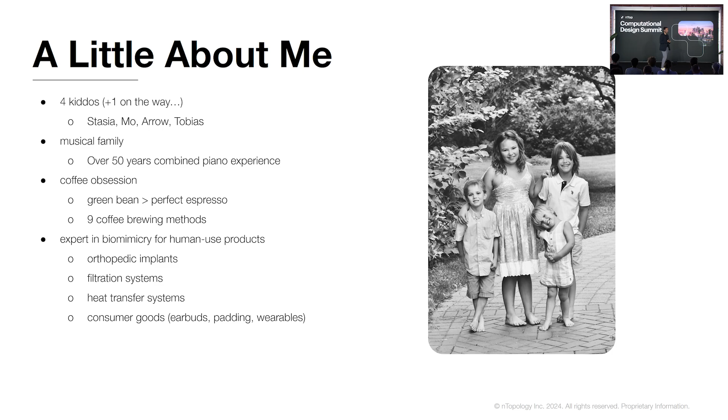And then, as Brad mentioned, I've just been privileged over the last decade or so to be able to take and produce biomimetic structures using computational design. And across the spectrum, right? Orthopedic implants is a specialty of mine. I've been able to work with large companies on the consumer goods side to build heat transfer systems, and to work on oil and gas systems as well. So it's just been a blast. So I'm going to talk about a couple applications first that are sort of here and now, and then a few future thinking applications. I'm going to try to get through this in my 13 minutes left, so we'll see.

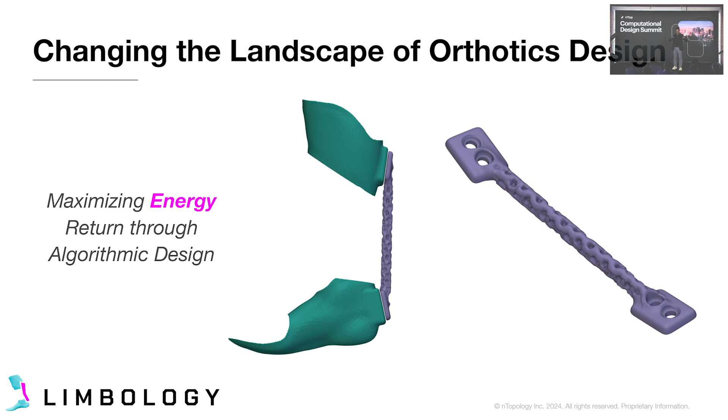So the first one is a company I've been working on with a friend of mine, and he came to me as a prosthetist, somebody who works day to day with people that have partial foot amputations in particular, but other sort of problems. And one thing in particular is in the world of CAD, orthotics and prosthetics is like decades in the past. A lot of the technologies these guys are using are like casting people and their anatomy. So if you think about what computational design can do for something like this, it becomes immediately apparent. But a lot of the time the software and systems aren't necessarily made for this.

So he came to me and said, hey, there's a lot of young people that have had amputations or some sort of deformity where the current stuff just doesn't work for them. Essentially it's carbon struts, some thermoform pieces. The materials are either too flexible or too stiff, depending on what you're trying to do. They don't provide sufficient energy return. They're exhausting to run in. The single-piece unibody designs aren't necessarily efficient. And the biggest problem is prosthetists spend hours to create something that's bespoke for a person.

And this is a similar theme, right? Med device, bespoke, patient-specific. You'll hear a lot of those things. It's an incredible way to utilize additive manufacturing and computational design. Even 3D printed products, which are starting to become a little more familiar, still suffer from a lot of things. Principal amongst them is that no one's really designed struts or connecting pieces that provide sufficient energy return.

And again, if you're designing and building an off-the-shelf product because you've got to make hundreds or thousands or millions of them, it makes sense, right? But no two people are the same. I deal with this all the time in orthopedic applications, right? Somebody's like, I need to develop a patient-specific implant. Everybody's anatomy is unique.

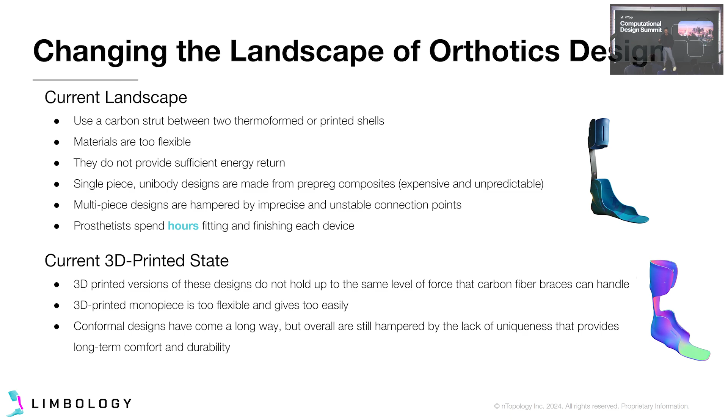Everybody's weight bearing is unique. Everybody's gait pattern is unique. So why are we building off-the-shelf products that are going to be a one-size-fits-all? It just doesn't work. So the idea essentially was, all right, we can do conformance. But what about activity level?

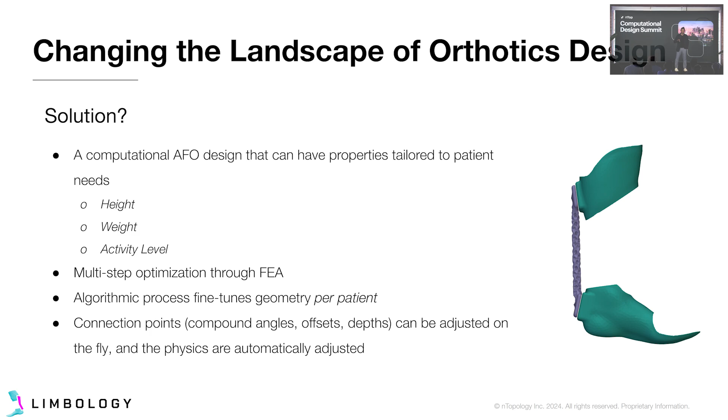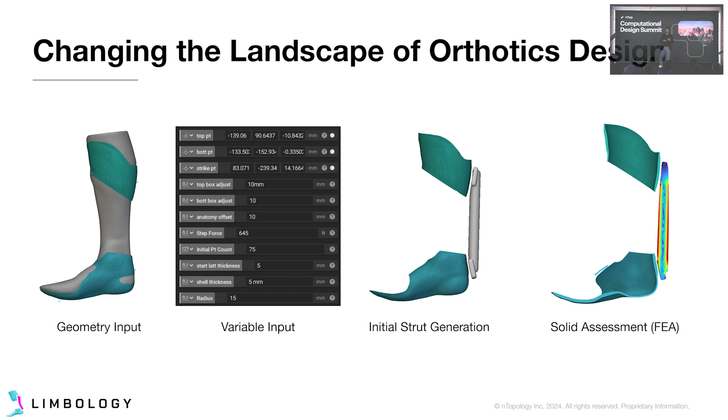What if you could take somebody and essentially do a gait analysis and reduce the gait analysis to the impacts that are happening right in their leg, and then be able to iterate and design for that? So we were like, well, shoot, this is a perfect application for nTop, right? So starting with geometry input through the variable inputs that we have, initial strut generation to encompass the problem. Here's the design space that we're working with.

Go through an FEA, do an optimization step, fill it with a lattice, analyze that, functionally grade, and then finalize and verify. So what I want to highlight here is, Brad sort of talked about it, this idea that we don't just have the nTop system, we also have the way to automate it. Automation can include being able to do lots of parts at a time. But with nTop Automate, you can also use nTop and other programs as a feedback loop for itself, right?

So it can calculate a problem, it can send it somewhere, something can analyze, it can check whether or not it fixed the problem or whether it's still got some ways to go. I think in your presentation or your article this morning, Brad, you called it differentiable. Differentiable systems basically means we can track the change that happens and measure whether the change was good or bad. If we need to rerun, we rerun. If we don't, then we stop there.

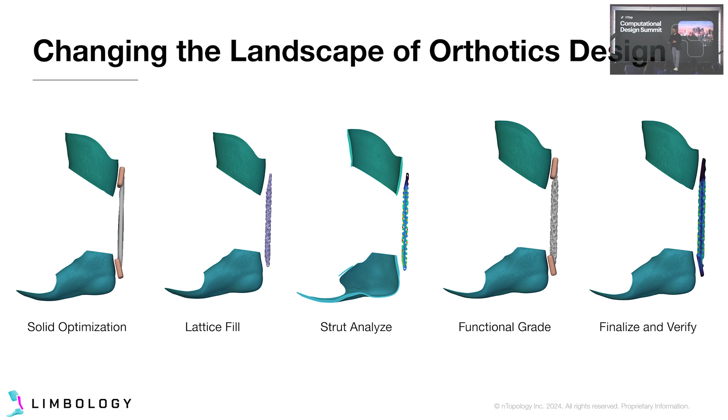So this idea is that we can functionally grade a structure. We can tune specifically for energy return. A lot of people tune for stress. Tuning for energy return is essentially looking at a displacement problem, which can be a little more challenging sometimes than just looking at stress problems. But because we can calculate vector fields from displacement, we can calculate the exact displacements on every single size simultaneously and pick the best one, which is super cool.

Another thing I wanted to point out is every single gap and hole that you see is not BREP at all. That's all generated computationally. What I think is so fascinating, especially with the new nTop algorithm, is that everything is incredibly precise. So all of those gaps remain the same. All of those blocks on the top and the bottom change with the patient. And every single hole where a bolt gets placed is all computationally generated.

I get a lot of people that are like, all right, I've got to take my BREP geometry, pull it into nTop, I could do some stuff, but I'm still relying on BREP. And I'm like, no, you're not. I'm going to design whole implant generation systems that have nothing to do with BREP at all inside of nTop. So it is possible. It just takes a different way to view the tools than what a lot of engineers are used to with traditional CAD tools.

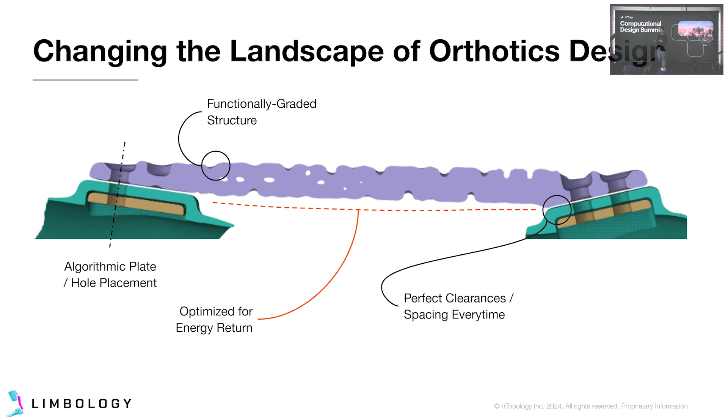The next thing I want to talk about is something I'm super excited about: I've been working with Yasmin at Uniform on the future of custom bodywear. I think this is a predominantly male-dominated crowd. So for those of you males who may not necessarily understand the problem, ask a female in your life.

But basically, here's the problem: 50% of all humans probably require some sort of support. If you look at the metrics, 70% of consumers say that finding an online fit is difficult. Traditional sizes, as with any product, don't fit bespoke bodies. Up to 100% of women have some degree of breast asymmetry. I should have put a citation. I actually found that pretty fascinating as somebody who tries to fit products to human bodies. Up to 100%, that's everybody. And even current tech online is unconvincing, right? You've seen certain AI-type things that fit products onto a body, but it's just not really there.

Something that was concepted was essentially the ability to use your iPhone, scan a body, and then using that geometry, what do we do with it? We can build computational pipelines to essentially make bespoke products on the fly. And again, I want to highlight the time reduction, which I think those of you that have used nTop are probably familiar with. Being able to take traditional sectors where designing a custom bespoke garment is going to take hours or days, and being able to insert somebody's 3D scan geometry into a pipeline and have it be done in seconds, I still get amazed at that every single time that I see it.

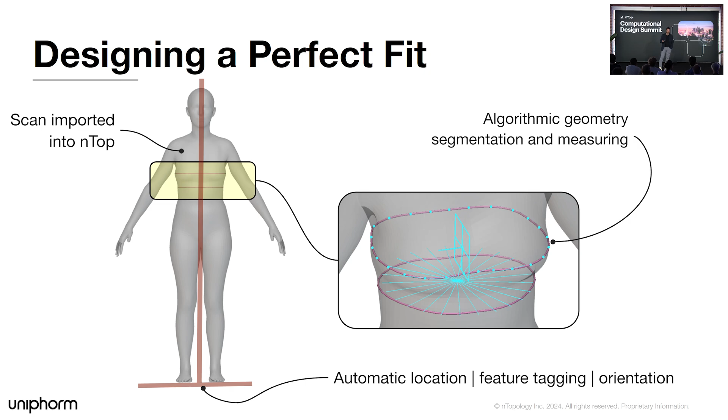So being able to take a scan into nTop, being able to automatically location, feature tag, orientation. Again, these are coming in as dumb meshes with zero identifying features. Being able to automatically measure various key features, being able to segment, being able to split, being able to map.

And then what I also think is pretty fascinating about using nTop is the ability to use fields. Prior to nTop coming out, this idea about fields, signed distance fields, other types of geometry, just wasn't in the forefront. Signed distance fields have been used in graphics, I think, for a little bit, but now it's being used as an engineering tool. I love George's presentation talking about BREP. It's great to see that historicity behind the development of CAD tools.

How many of you guys use SolidWorks? I've used SolidWorks before. How many of you guys know the SolidWorks error sound? The doo-doo. You know what I'm talking about? That haunts my dreams, man.

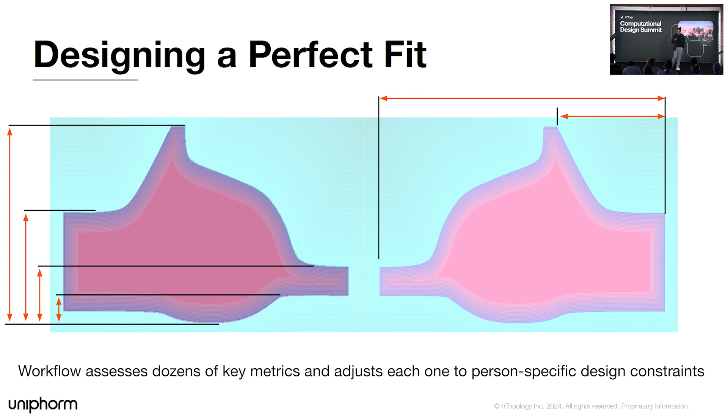I've used SolidWorks now for probably about 18 years, and still use a good mix of the tools between the two because I have to, at least for now. But when I first got nTop, Brad, I think it was early alpha, 2018 sometime, even then, the ability to just build stuff and have stuff make sense, right? Like George said, if the math works, and of course it does because it's math, then the parts work. And I was just fascinated. I couldn't break it. Sometimes I would do something stupid and get a weird black-looking blobby thing, but that was my fault. That was not the software's fault.

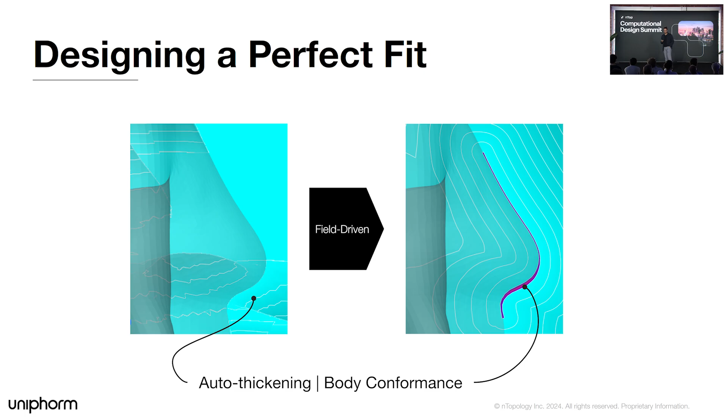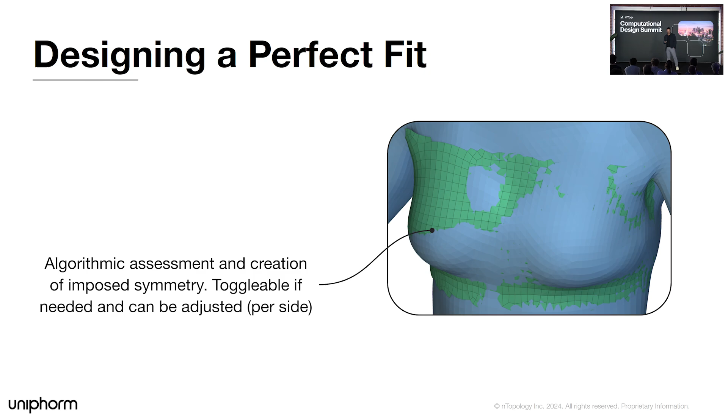But as somebody who spent so long troubleshooting all these little tiny features, the ability to convert CAD for human use products into things that just make sense, fields that can warp and be manipulated in a map. So being able to use field-driven design so that essentially every single thickness of every single shape is precisely calculated. And then also being able to create algorithm assessments of the body, like for those asymmetry problems, for those people that may have some sort of deformity or issue, is an incredibly important way to utilize the tool. And being able to customize profiles, adjustable, patient on the fly is pretty great. Again, dragging in geometry, output of a product that's going to fit perfectly on somebody's body in 15 seconds. I think that's pretty cool.

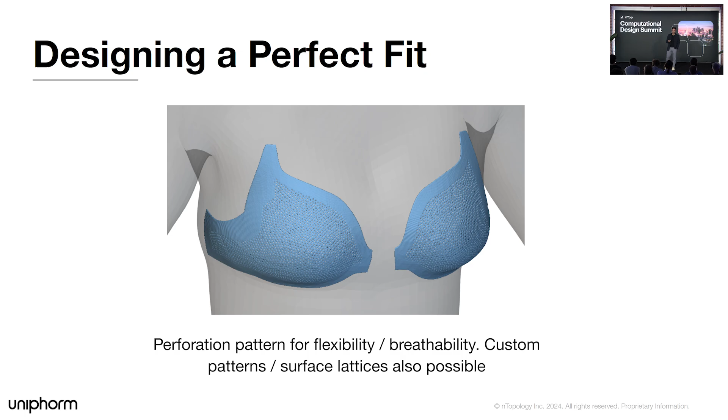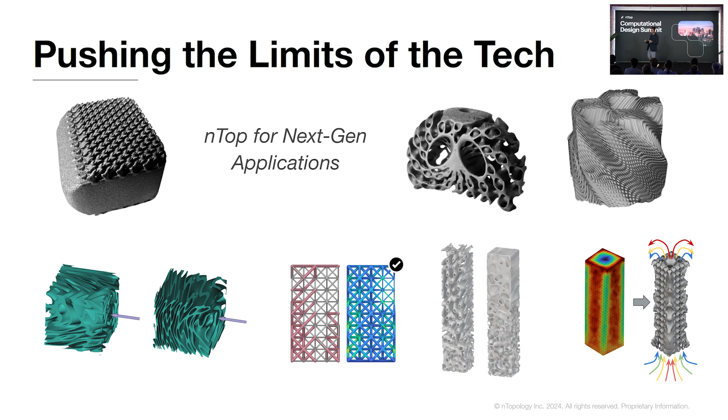So let's talk about some future stuff. I've been, again, privileged to be involved in lots of stuff to be able to push the limits of the tech. The additive manufacturing tech: on the panel they were talking about how 3D printing sort of surpassed computation or design tools with its complexity, and now we've got the ability to design crazy things that oftentimes are pushing the limits of what 3D printing tech can even do. So we're going to go through these. None of these are going to be super deep. You can ask me about each one of these afterwards.

The first one is essentially an algorithm that was built because I was fascinated by only putting the material in a structural problem that absolutely needed to be there. In other words, I know that topology optimization says that it can do it, but I wanted to do something a little bit further. I wanted to be able to say, if my stress limit for my yield stress, something that's going to last 5 million cycles inside of a body, has to be 400 megapascals, is it possible to essentially get it to be 400 megapascals everywhere in the structure at the same time?

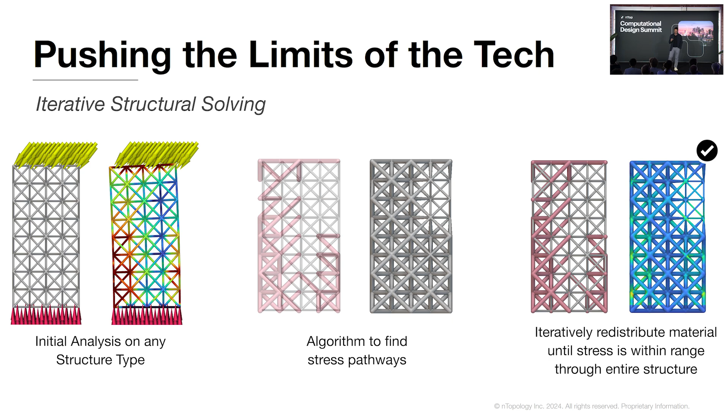Most of the time, those tools, when you rerun them and you solve them again, they still have red and blue. Blue means it's not getting stressed. So what you'll notice is on the very right, by essentially tuning the algorithm to identify the direct beam pathways, we can homogenize the structure while still keeping the same design shape in the envelope. So that was a really cool problem, and it works with any structure and any loading condition, which is also cool.

Being able to look at multi-physics types problems, that's a really, really important thing nowadays, right? Because very rarely are domain-specific problems singular. We don't solve for structure and then say we forget about everything else. A lot of times it's structural, there's heat, there's fluid flow, we've got some environmental concerns. So nTop provides us the ability to take multi-physics informed workflows. So things like heat transfer, structural, fluid flow, all can be computed, analyzed, and weighted at the same time, which is incredibly cool.

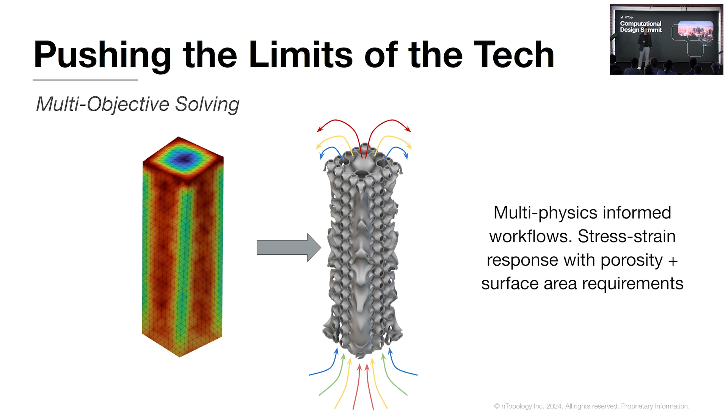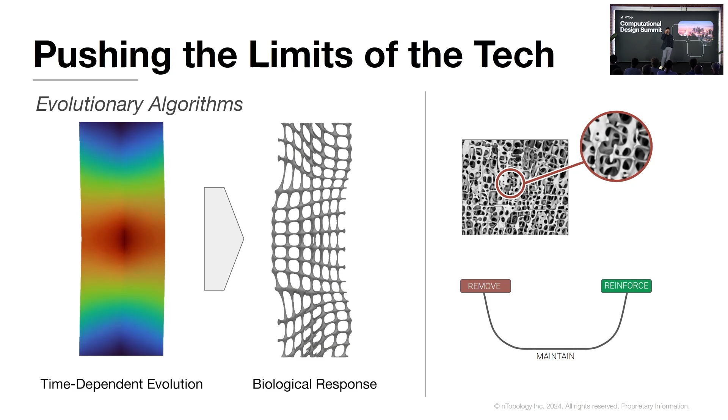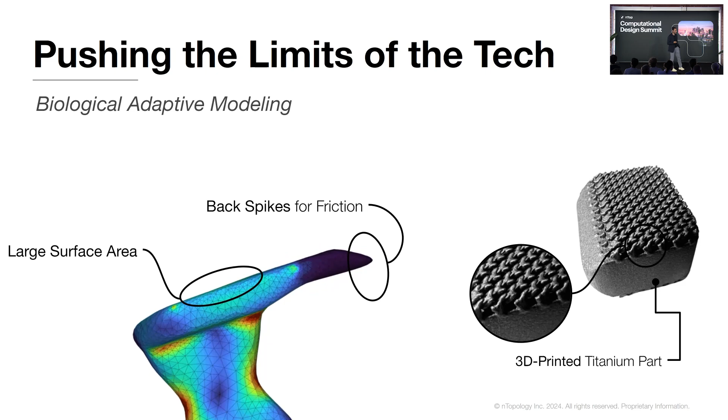This was an incredibly fun project to work on last year, essentially creating overlapping shark scales and being able to apply those as a field to any solid. Because what we noticed was each spike is essentially compliant. So it was able to be loaded in a compliant manner, but it was able to resist when the device was pulled out. So this was a challenging problem that we were working on in the medical device space. So again, being able to create these sort of structures would not have been possible.

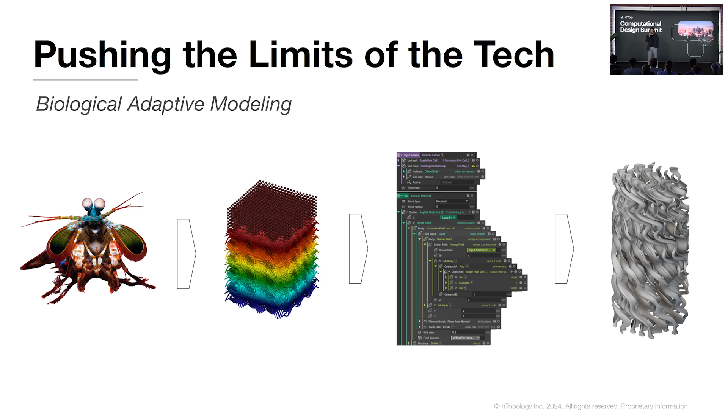My absolute favorite animal, you can ask me about him, is the mantis shrimp. The mantis shrimp structure inside of his club is unlike anything that has existed in nature. You'll see there the color visualization. When I worked on this 4 years ago, no one had ever modeled this structure in 3 dimensions before. It wasn't possible to do, even though you could print it, you couldn't use it. So, my mad scientist way, I was like, I just need to be able to print this. Because it is so incredibly important for things like impact resistance, because that's what the mantis shrimp uses it to do. So again, prior to the advent of nTopology and computational design tools, this sort of stuff was not possible.

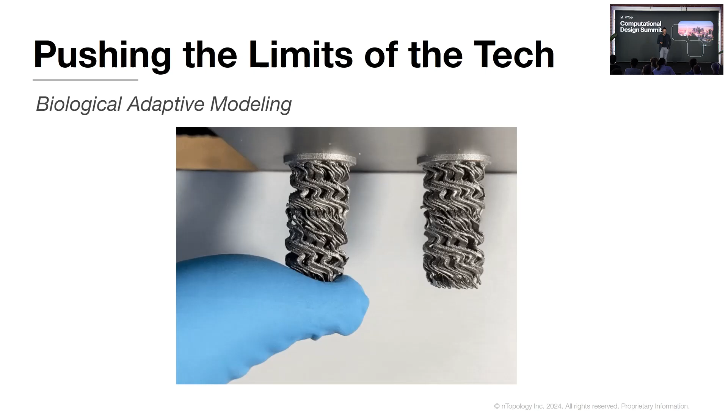Brad mentioned Lattice Robot. One of the things we're trying to work on is creating bespoke custom structures and surface textures for people to be able to use in computational design tools. Because every single domain-specific problem is really hard to solve, and engineers know that. So giving them the best possible structures and surface textures, and being able to exist in an environment to computationally solve and analyze, is incredibly important.